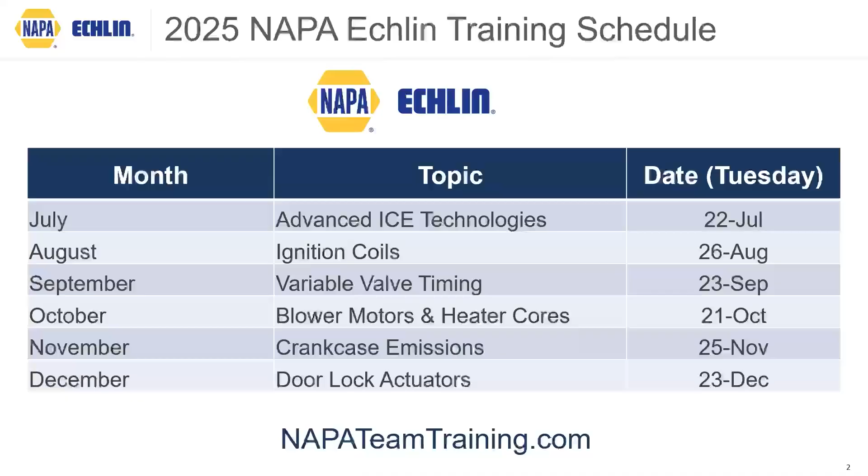So again, today's topic of conversation is evaporative emissions control. And here's why we're talking about it. In 2024, the fifth most common check engine related repair was replace evaporative emissions purge control valve. That's a pretty bold statement as far as I'm concerned. I mean, when we go into a shop and there's a diagnosis being done on a check engine, it's usually related to a million other things outside of evap. It could be related to the oxygen sensors, the fuel injectors, ignition coils, so many different categories.

But the reality is cars are all running with some form of evap emission system today. And because of that, and because we have purge in all of these systems, if the purge is not working properly, that check engine light is going to come on, and we see it's a pretty common issue now. Again, the fifth most common in 2024. So your technicians are seeing this, they're diagnosing this, and they're fixing this, and they need to know that you have everything available for them when those cars come through their bays.

Now, here's the thing. When it comes to evaporative emissions, that check engine light is generally speaking the first point of contact that most people are going to be familiar with. And what I mean by that is, motorists are not going into the shop and saying, "Hey, technician, my car smells," or it's making a funny noise, or it just doesn't run right. Typically, the concern is just that the check engine light is on. They're not experiencing anything. They just know that the light has come on. Now, in the older days, there may have been some drivability concerns, but for the most part, it is now a no symptom emissions related failure that's going to turn that check engine light on and bring that customer into the shop.

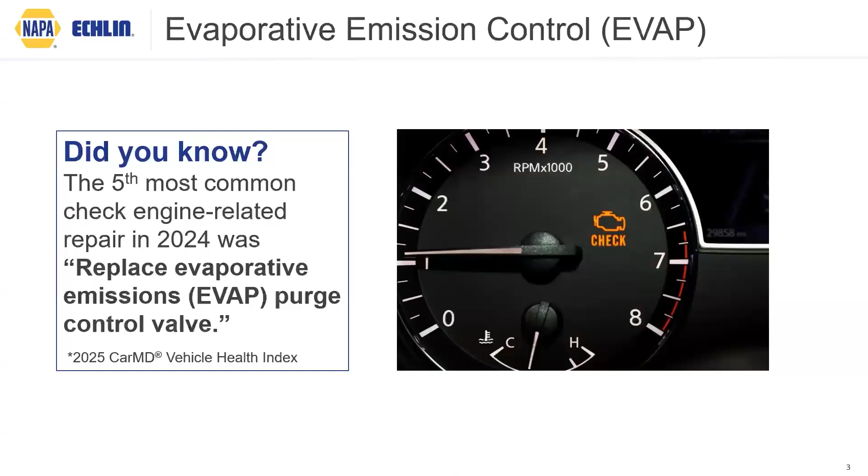So, different manufacturers use different strategies, different components, but it's all to achieve that end goal of keeping hydrocarbons from leaking and being released into the atmosphere. That's all the EPA and CARB asked. Just make sure that doesn't happen. How you do it, not our problem. Hopefully there will be a consensus on what that looks like one day. But for now, for technicians, there's a lot of diagnoses that they have to go through on different manufacturers just to get this job done and make sure that it's not releasing those hydrocarbons into the atmosphere.

So we're going to talk really quickly about how it works, what types of leak detection systems, because really at the end of the day, we have to make sure it's not leaking. That's where we're going to get those atmospheric bleeds. So we got to make sure it's not going to leak. So what do those look like? What are those types of leak detection systems? We'll talk a little bit about how most of these will fail, the primary reasons why they fail, and a couple of quick tech tips to maybe avoid a comeback in the future.

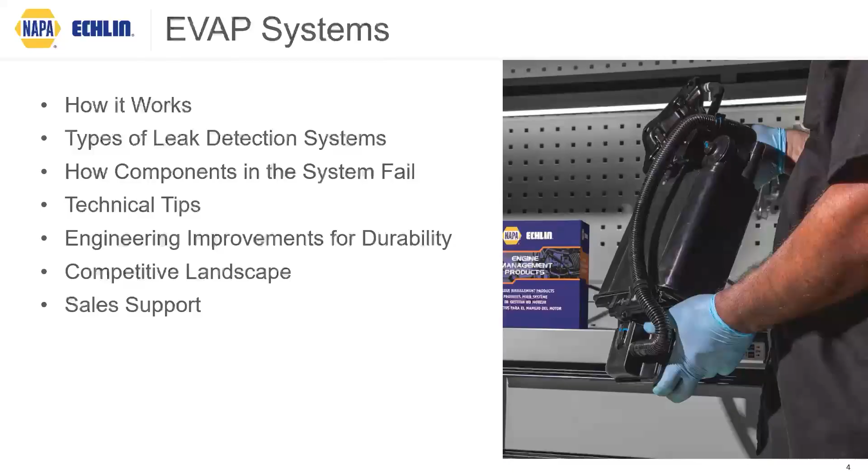And then I'm going to pass it over to Jesse to talk about some engineering improvements that we've done to make our parts more durable when it comes to EVAP emissions. He's also going to talk about the competitive landscape, which I think you'll be happy about because you're going to see, just like most categories in the Echlin brand, there's nobody out there that's going to be able to surpass our excellence. And then we'll wrap up with Aaron talking about some of the sales support material we've put together for you so that you can go out and have these good conversations and be able to back up what you're talking about.

So how does it work? Well, it's kind of simple. Let's say we're at the gas station, we're putting fuel in the tank. Well, there's going to be air that's going to be displaced in the tank. It's got to go somewhere. And when you're putting fuel in, there's going to be vapors and they have to go somewhere as well. And so this is where EPA and CARB, the lawmakers, told the manufacturers, those are the vapors that you have to catch. You have to contain those vapors. We don't care how or what method you use, but we are going to put a couple of rules in place that are going to make sure that you do get this done and that the PCM is going to test for.

Well, with the purge valve, the vent valve, the fuel tank pressure sensor, that's all going to be loaded and sending information to the PCM. And if it sees a deviation, that's going to put the check engine light on as well. And then we have to monitor all those components, and make sure that the circuit is working. There are no out of range values.

If there are out of range values, that's where that dash light's going to pop up and indicate that we have an issue, even if the vehicle is driving just fine. Again, remember, a lot of times these are no symptom check engine lights. It's just the PCM knows something is not working correctly.

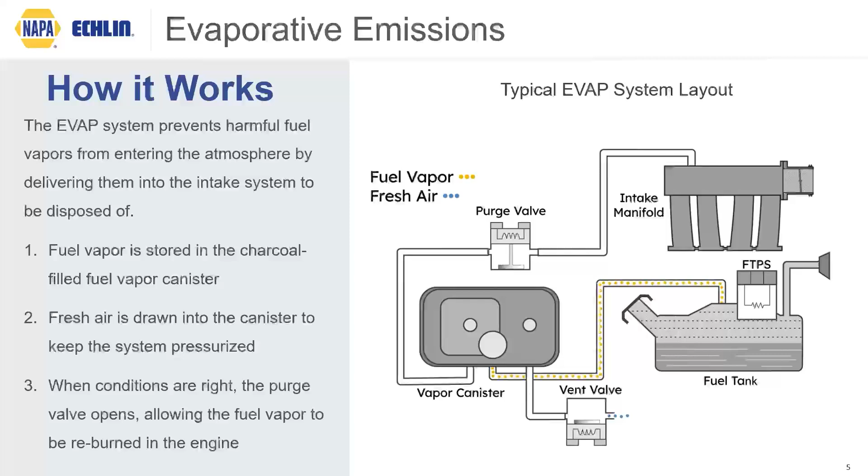And it can look different on different vehicles. Some vehicles will not have a fuel tank pressure sensor. Some will have a vent and purge valve combination. It just depends on the vehicle and the manufacturer, because again, there was no specific way it had to be done, just that it did have to be done. So manufacturers have done things a little differently.

And so here's a couple of the systems, or really the primary systems that you're going to find in vehicles that are the types of leak detection systems. These are the systems that let the PCM know if there's a leak or if there is not a leak and keeps that check engine light off.

So some manufacturers will use what is referred to as an evaporative system integrity monitor or module, the ESIM. And here, there is not going to be a vent solenoid per se that's turned on and off, but when you tear one of these apart and look inside, there are actual weights. And so depending on the pressure or the vacuum of the system, the weights will be lifted or dropped off of their seat. And depending on the conditions, it's going to allow fresh air to come in or go out. So it's kind of acting as a sealed all-in-one unit.

Now, because these weights naturally seal the system off, it can actually burp itself by lifting the weights, but it should be in a naturally sealed state at all times. And there's also a set of contacts in there and a rubber diaphragm. And so the ESIM kind of acts as both the vent as well as the monitoring device. So it's going to be able to vent and make sure there's no leaks, but also send that information to the PCM with changing voltages so that the PCM knows what's going on. This is one of those scenarios where we're not going to have to worry about a fuel tank pressure sensor.

Now, in older Chryslers, you had the mechanical leak detection system or leak detection pump. This one had vacuum applied to it, and it was electronically controlled. And the easiest way to think about this type of system is more like a bicycle pump. What it would do is it would read and calculate the size of the system. It would determine how much fuel is in the system, how much air is in the tank. And it would figure all those numbers out, and then it would say, okay, in order to vent this or purge this, I should take a total of 6 pumps in order to pressurize to a certain level, whatever the PCM is expecting it to be. So whether it's 4 pumps, 6 pumps, it knows I need to put this many pumps in to pressurize the system, and then I'll know there are no leaks.

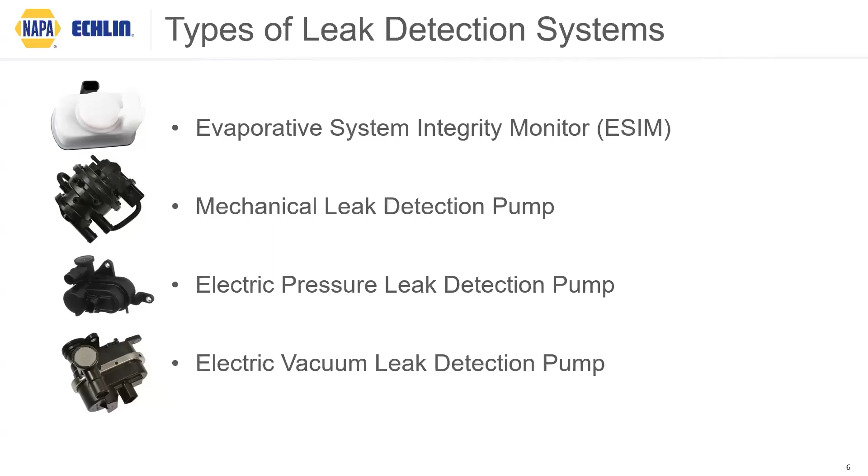So what are some of the more common failures on these? Again, this is very high level, but the most common reasons will be damaged and worn components along with electrical issues. Now, when it comes to damaged and worn components, obviously age, mileage, your general wear are things that will have a pretty big impact.

We can also have issues with solenoids and valves sticking open, which again is going to cause system leaks, or at the very bare minimum, the PCM not recognizing what's going on and throwing that check engine light on. And then of course, with electrical issues, this is on anything: cam crank, fuel injectors, ignition coils, especially any place where corrosion is pretty common, or salt on the road is pretty common.

And I'll tell you too, we see it a lot here at the training center whenever we're doing vehicle testing. The amount of vehicles on the road today that are missing fender liners and missing engine covers underneath the car and skid plates that protect a lot of these kind of components, it's just overwhelming. There's so many cars out there missing pieces of plastic that are exposing electrical connectors and components to everything on the road. So not just heat, not just vibration and general wear, but poor maintenance where something isn't replaced when it should be can cause issues with electrical connectors and components.

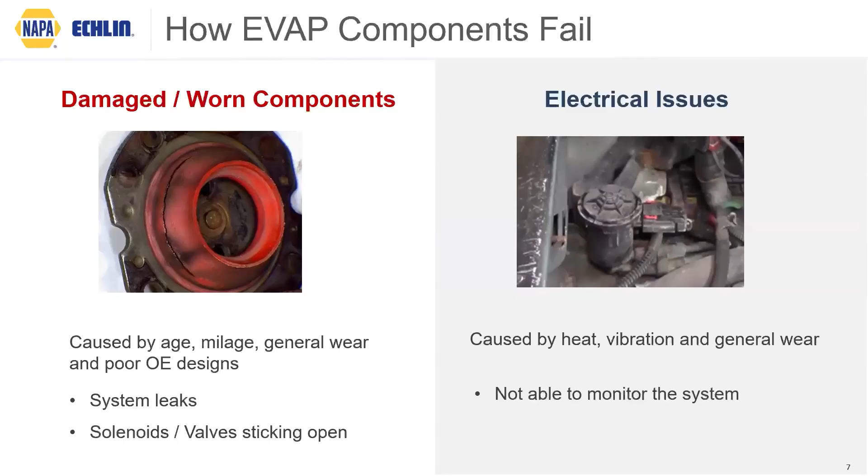So it may be a situation where you need to replace just a pigtail, or you may need to replace the component and the pigtail. Either way, we've got you covered, which means you've got your customer covered there as well.

So just a couple of quick tips on my end before I pass it over to Jesse. One of the most important things when you're doing anything EVAP repair related, after the component is replaced, we need to go into the scan tool and we need to run a self-test to verify, one, that no DTCs have returned, but two, that the PCM can determine and see that the pressurized system is doing what it's supposed to do and there are no leaks, right?

Now, in some cases, you may not even have a DTC, but if you look at certain scan data, you can see it's not really performing the way that it's supposed to, but it's not bad enough to hit that DTC, to kick that check engine light on. Some EVAP leaks are going to be very hard to find because it depends on the vehicle, but there's a lot of different lines. There's a lot of different hoses that could be involved. So in some cases, you may actually have to use a smoke machine to find the actual leak. It really is a great way to find the problem.

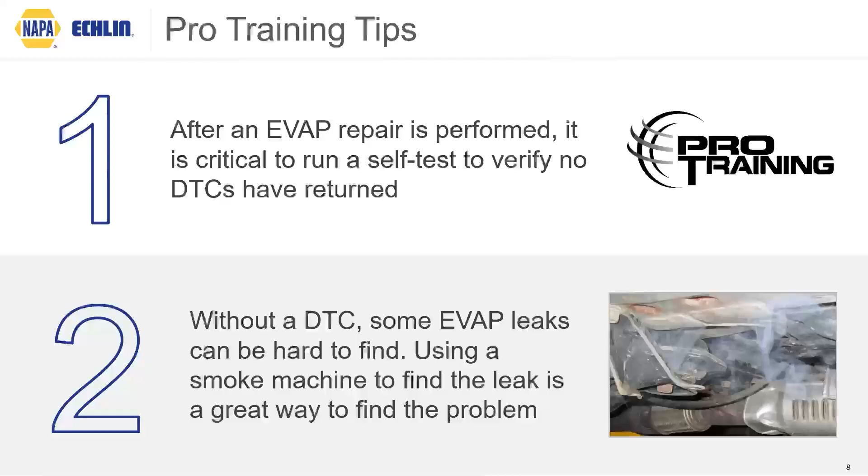But regardless of whether the DTC comes back or there's not one present at all, anytime we replace something, we need to do a self-test to verify that the system is working properly. Another thing to note is, and this is not just me saying this, experts all recommend replacing the fuel vapor canister when you replace a failed purge valve or solenoid.

So remember, most times this is a no symptom check engine light. I think we all can agree that most check engine lights people ignore for as long as they possibly can, even if there is a drivability issue. Well, they're certainly going to ignore it if there's no drivability problems and it's just a check engine light. When that happens, if we go for long periods of time where the purge valve or the solenoid's not working and we're not purging those vapors out, eventually it's going to cause damage to that canister. And so in a lot of cases, it's smart to recommend the vapor canister along with the purge valve at the same time.

That way we know when we put the system back together, we're not going to have any more check engine lights. And then one last thing on my end, now you can go back to the YouTube channel and watch last month's Power Hour on EVAP diagnostics, because we make a good point there when it comes to turbocharged vehicles. They can require different and more complex testing.

So it's kind of important for a technician to not only understand all these different EVAP components, all these different types of leak detection, but now they're going to have to adapt that to turbocharged vehicles, which is a lot of the vehicles on the road today and even more coming out every year. So when it comes to EVAP, there's a lot to it. The technicians are seeing it pretty much every day now. And at the end of the day, we have the program that's going to take care of those customers when those vehicles come through the bay.

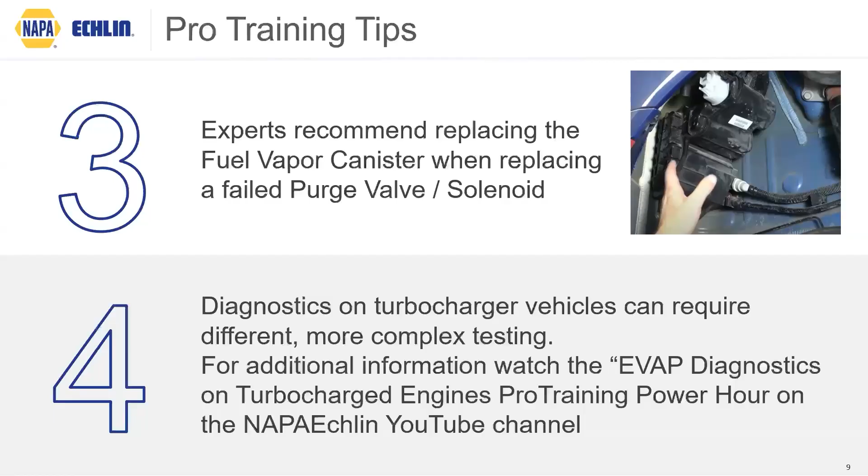So that's my portion. I'm going to pass it over to Jesse. He's going to talk to you about really what's in your box and what that competitive landscape looks like and what we're doing different to make sure your customers are happy when they purchase those Echlin EVAP components. So Jesse, show's yours, sir. Take it away. All right.

Well, thanks, Corey. And now that we've covered the technical aspects of EVAP, let's jump right into NAPA Echlin's industry-leading EVAP program. So when you reach for the Echlin box, this is what you're getting. 15 global R&D centers, 21 manufacturing facilities, including Greenville, South Carolina, and Independence, Kansas, which specialize in emission control parts. You get the full battery of tests performed on our parts, and Echlin takes things a step further with on-vehicle testing. Finally, you get top-notch sales support provided by our expert trainers, digital content and marketing materials, including videos, flyers, and of course, the full product catalog.

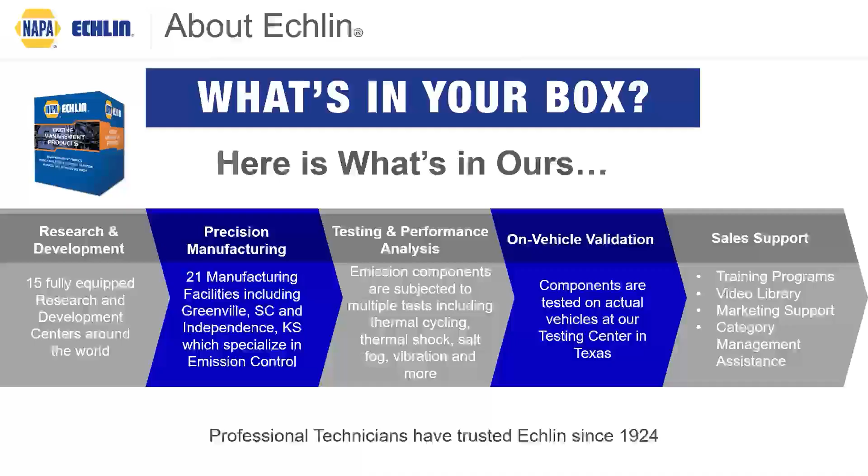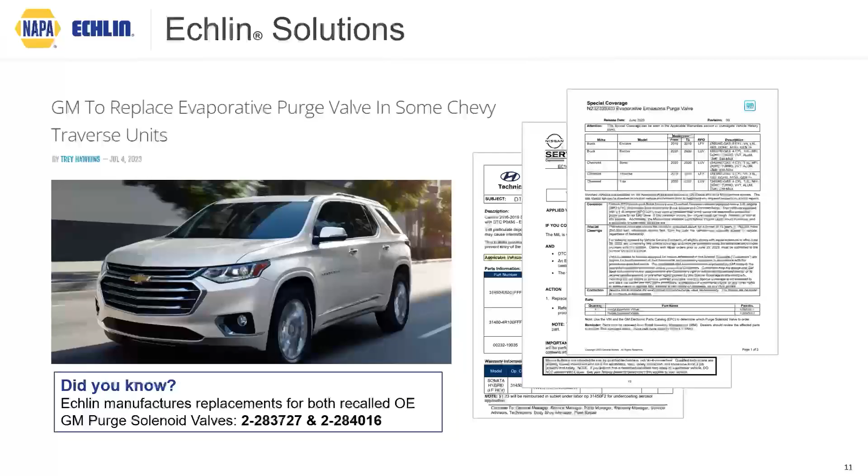Now, the product management team's always on the lookout for emission-related recalls and TSBs to suss out opportunities where Echlin might offer a solution. A great example of this involves failing purge valves on a number of late-model GM vehicles, including the Enclave, Encore, and Traverse, just to name a few. And Echlin manufactures valves designed for improved durability to replace these failing OE units. Let's take a deeper dive into a couple of those.

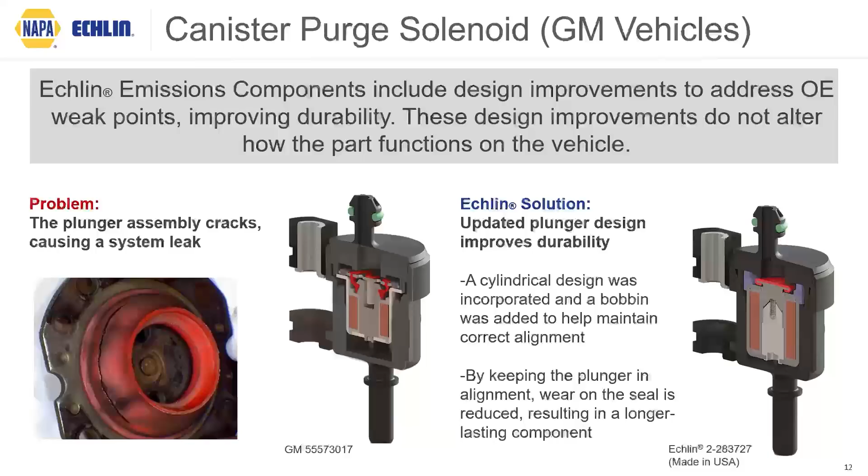Now, here's an example of an engineering improvement we've made on a popular GM canister purge solenoid. The OE unit on over 5.5 million GM vehicles has a plunger design susceptible to leaks caused by cracking or tearing. We were able to design and manufacture a new component that works exactly like the original, but with an improved design that doesn't cause the seal to fail.

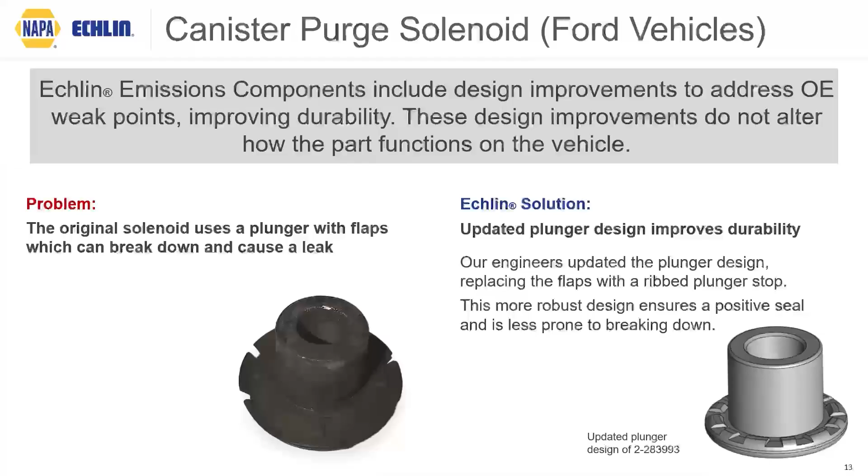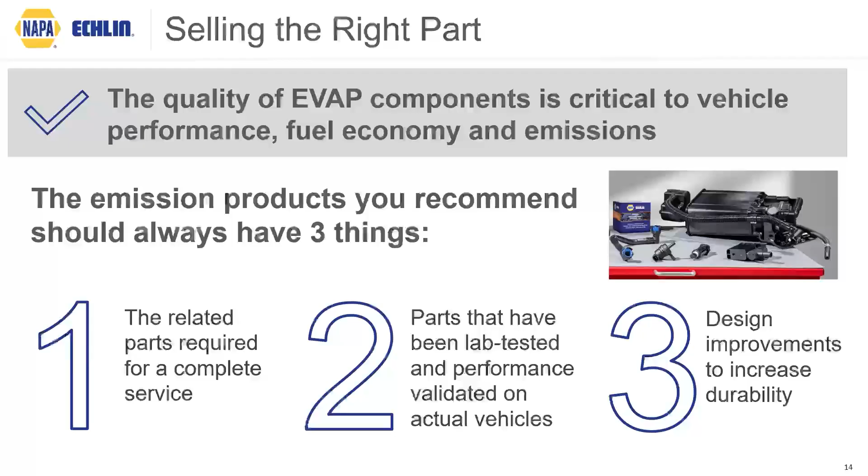Now, you've probably heard it before, but it bears repeating. Quality EVAP components are crucial for a vehicle to function and perform properly. So, what does a comprehensive EVAP program even look like? Well, you'll want a program that offers the parts needed for a complete service. Remember, these are systems, and your supplier should be able to offer everything needed for the entire EVAP system, not just part of it. You'll also want parts that are tested for durability and proper functionality, not just in the lab, but on actual vehicles as well. And finally, you'll want design improvements where necessary for improved durability and a longer service life. The part will function as intended by the OE, properly integrating into the vehicle's EVAP system.

Our industry-leading coverage will allow you to better service your customers. So let's take a high-level look at what NAPA Echlin offers as the aftermarket's most complete EVAP program. As you can see here, we've got canister purge solenoids and valves, vent solenoids and valves, vapor canisters, leak detection pumps, and purge and vent hoses. Now, it might be helpful to keep in mind that the terms valve and solenoid are essentially interchangeable, and the valve simply refers to a complete assembly that includes a solenoid.

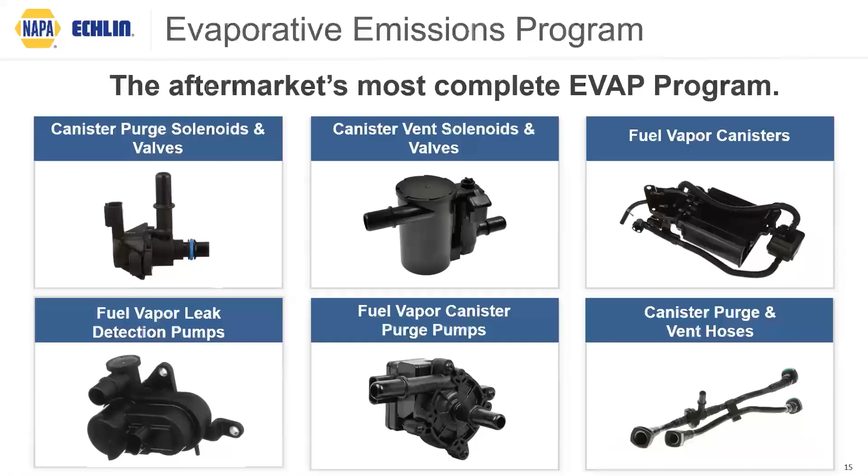And here we can take a look at how Echlin measures up to the competition. And well, folks, the numbers don't lie. Echlin leads the aftermarket when it comes to full line EVAP coverage, and this is especially true of the most critical components, such as vapor canisters, purge and vent solenoids and valves, and EVAP hoses, which means advantage Echlin.

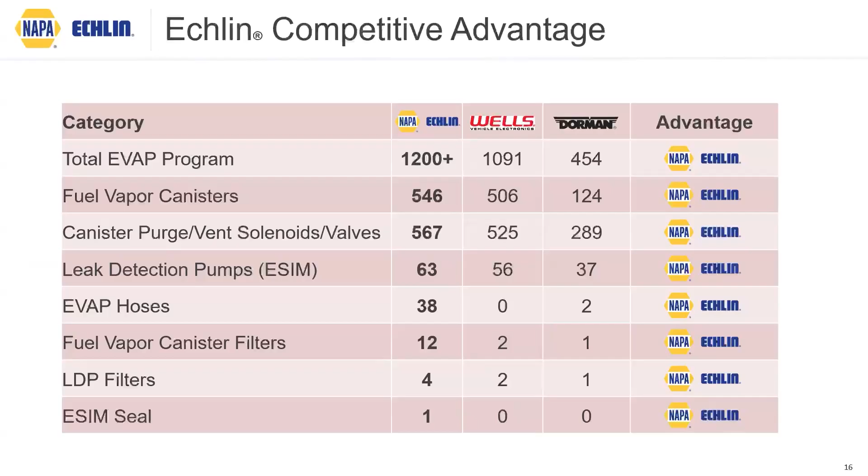All Echlin eSIMs are designed and built at our Greenville facility in South Carolina, and I can't say enough about the work our engineers have put in to make these the best eSIMs in the aftermarket. Our eSIMs are just another example of Echlin's attention to detail that you'll find across all of our product lines.

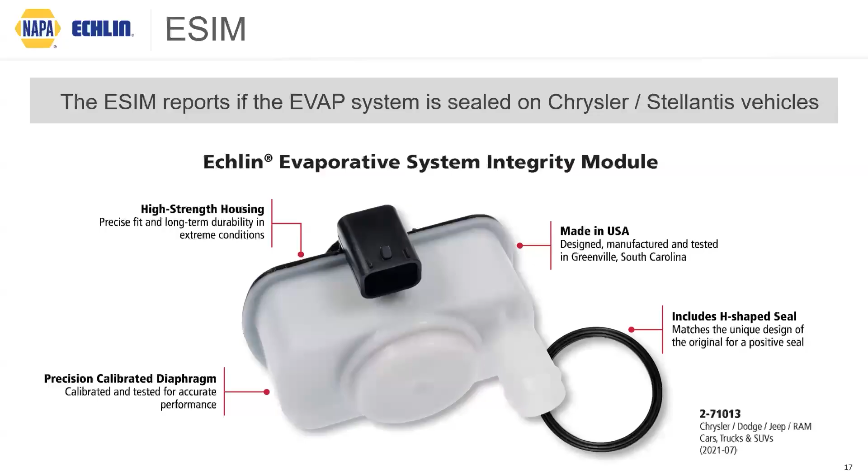For example, the seal you see on the right of your screen, not only do we include it with all of our eSIMs, our design matches the OE-style H-shaped profile, where most of the aftermarket competition is supplying a traditional O-ring. It's important details like this that elevate the Echlin brand, and something you can be sure to mention to customers.

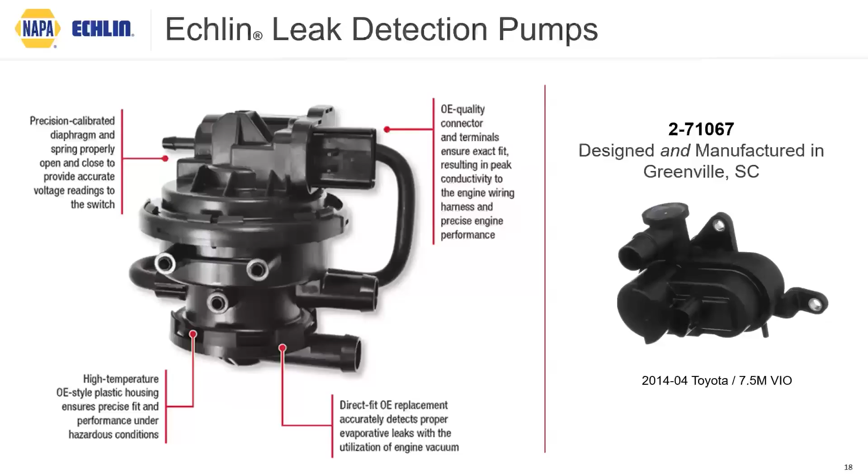As Corey was discussing earlier, leak detection pumps are one of the more complex components in an EVAP system. As the name suggests, they allow the EVAP system to be pressurized to test for leaks. And given this complexity, you shouldn't be surprised to hear that they require expert manufacturing to perform correctly. And again, our incredible team at the Greenville facility that I mentioned before designs and manufactures some of our most popular pumps to match OE specifications and set the aftermarket standard for quality and durability.

In addition to offering the most complete EVAP program, we also have the smartest. All 9 of the GM OE numbers you see here use the exact same canister purge pump. The only difference are the brackets. The Echlin 2-33032 is a direct replacement for all of these OE numbers, allowing you to cover nearly 3 million popular GM vehicles with just one part number. It's also important to note that this consolidation is fully supported by GM in accordance with their service bulletins.

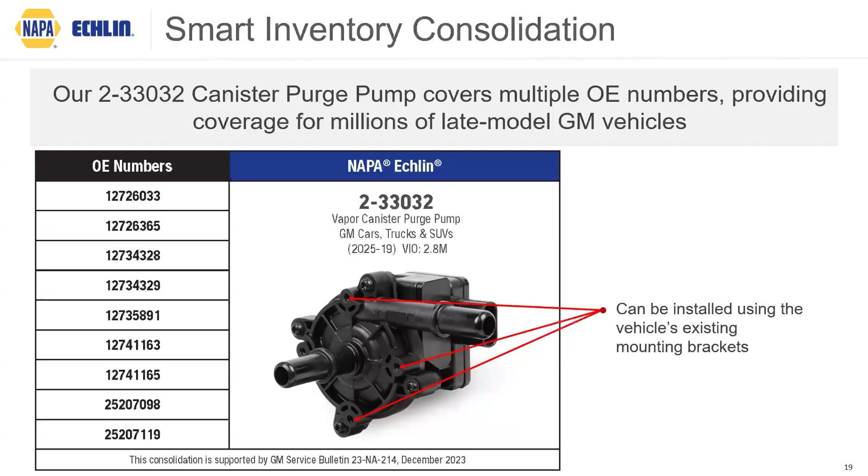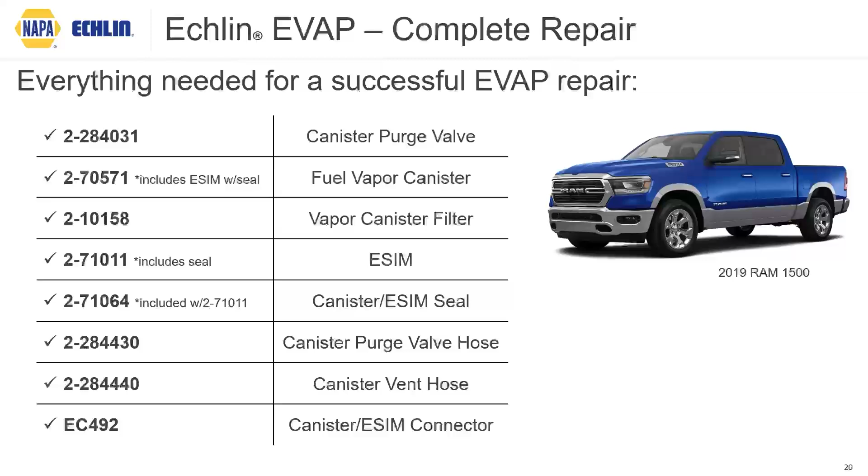And remember that ESIM seal I mentioned earlier? Well, in addition to including it with our ESIMs, we also offer it as a standalone part, 2-71064. And of course, this is just one of many examples where NAPA Echlin offers all the parts needed for a complete EVAP repair.

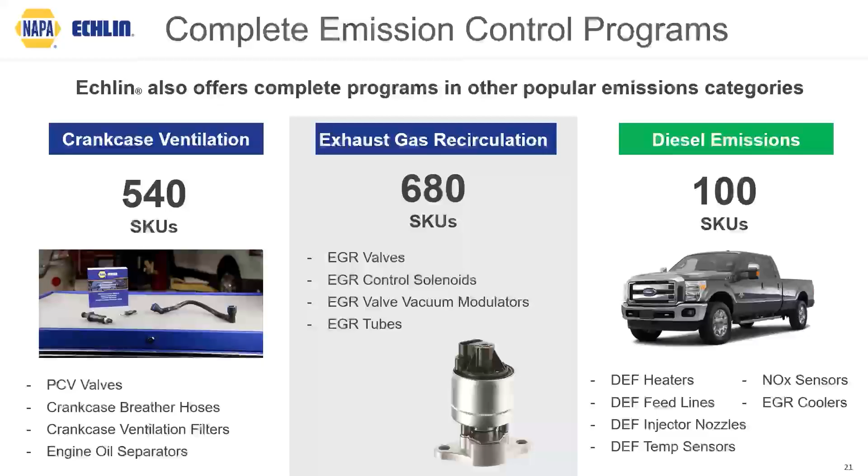And here you'll see an overview of Echlin's emission control offerings, complete programs, just like EVAP. And as you can see, we've got all the coverage needed across crankcase ventilation, EGR systems, as well as diesel emissions.

Now, due to extreme temperatures, water, chemicals, dirt, and road salt contamination, the underhood environment is extremely hard on auto parts, as you might imagine. That's why our manufactured emission control products undergo rigorous examination and product validation, including extensive performance benchmarking, product lifecycle testing, and end-of-line testing. And finally, to validate our stringent processes, many Echlin emissions products undergo live on-vehicle testing at our Texas facility.

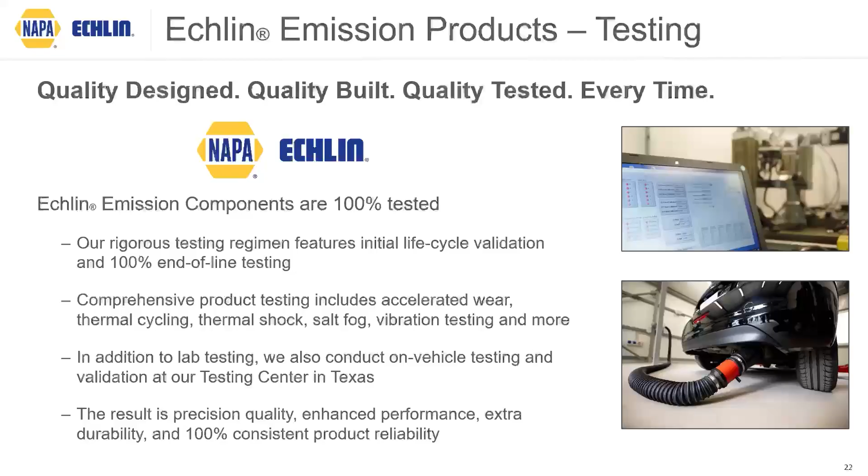A couple of things that I want to go over are some of the support materials that we've created for you to help you take some of this messaging to the street. Certainly some of this can be used within your own store, talking to other parts professionals, but a lot of this is really geared for your auto care centers and all of your service provider customers. So hopefully you feel a little better about our program now, and we just want to help back you up with some printed materials.

So the first thing we'll talk about is this simple 4-page evaporative emissions program brochure. It's a pretty new piece, but it really does a nice job of surveying the whole program. It speaks to all of the different components that are in the portfolio, as well as some very specific design improvements that we've done on part numbers that address OE weak points that allow them to last much longer than the original part did. The next piece we'll talk about is over there on the right, the new part spotlight.

The front side of this speaks to new items that we've recently released.

And this helps us tell a very good story about late model coverage and being at the forefront of this. But some of these parts are frankly probably a little too new to really be selling right now. But the backside of this features what we call up and coming numbers. These are all parts that have been introduced within the last 3 years that are really starting to see strong growth in terms of sales out. So we've compiled this data from our category management team, and these are numbers that we are beginning to recommend that parts stores add to their inventory so they can be at the leading edge of this.

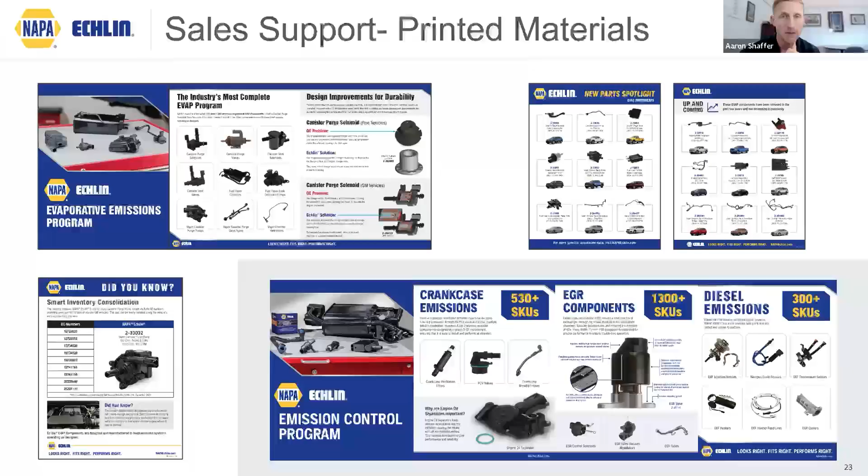So yeah, we'll move on from here and talk about some of the things that we've done digitally. As was mentioned earlier, we do have a pretty robust YouTube channel to support the Echlin brand with over 550 videos on there. We have an EVAP specific playlist. But one thing that we've recently done, we launched a new training series last year, and we've continually updated that, created new videos. So a few weeks ago, we launched a new EVAP training video. It's only about 3 minutes long, but it does an excellent job of recapping the program and the features and benefits of our parts. It's almost a shortened or distilled version of this 30-minute presentation in 3 minutes.

Also at napaechlin.com, under the digital resource section, if you just type in emissions, one of the things you'll be able to click on is a very, very detailed product portfolio. This is a digital book. It's a digital guide. It's almost 30 pages, and it goes pretty deep with some technical information on the components within all of our emission programs.

So I think we can start to wrap it up. And some of the highlights of this to recap is coverage. We're fortunate that we are able to go to the market with the most robust, the deepest, the widest EVAP program in the aftermarket. So we don't have to miss sales. We have parts that are extensively tested, both in the lab and on real vehicles. And I know that's a big differentiator. We've done some very specific design improvements to address OE weak points that do not alter the performance of the part, but they do allow it to last much longer than the original parts. And some of these parts are very, very popular because the OE ones obviously fail quite a bit.